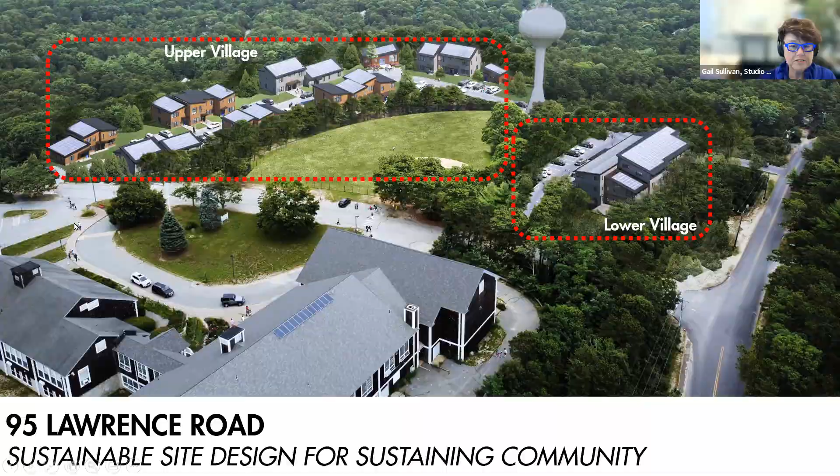And there's also a road connection to Lawrence Road there. It's basically a big loop around the ball field, the way we've organized that. There are a few reasons for that I'll get into. I'm not going to go through all of the detail here.

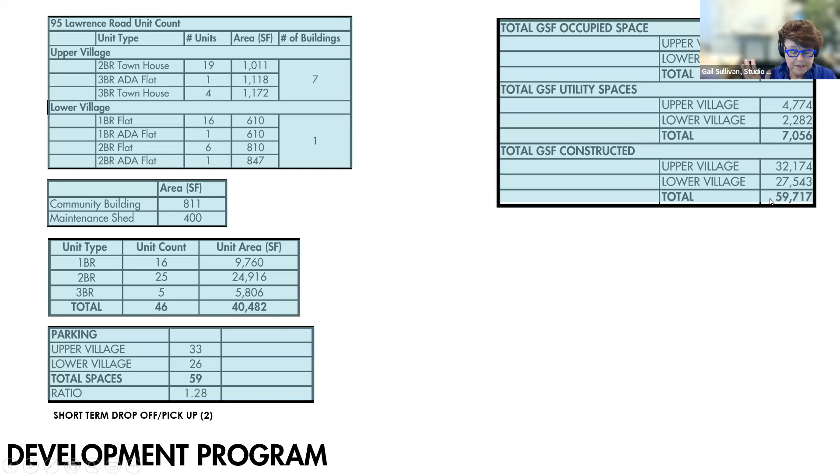I just want you to know that we have all of the details in case there are questions. This is basically giving the unit count, the gross floor area of all of the buildings in total. So we have 40,000, almost 500 square feet of housing, plus another approximately 1,200 square feet for community building and a maintenance shed. So the total gross area constructed is going to be about 59,700 square feet, just a rough idea.

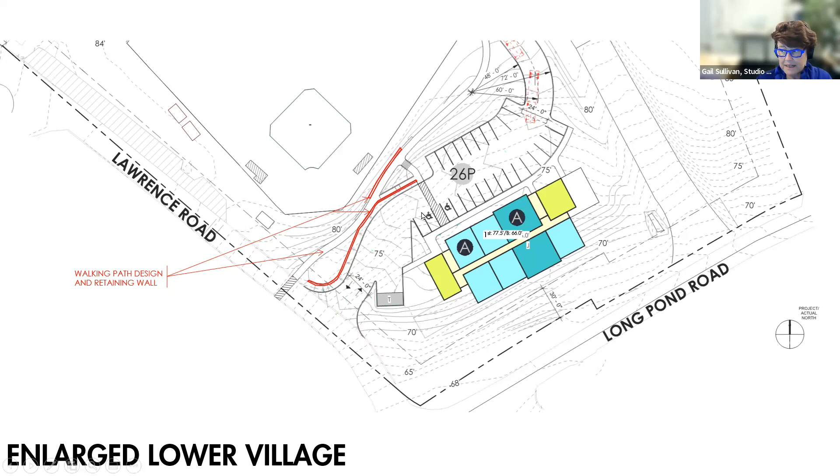So Sean's team has done a magnificent job in the last couple of weeks, really refining this with our landscape architect so that it looks beautiful for everybody.

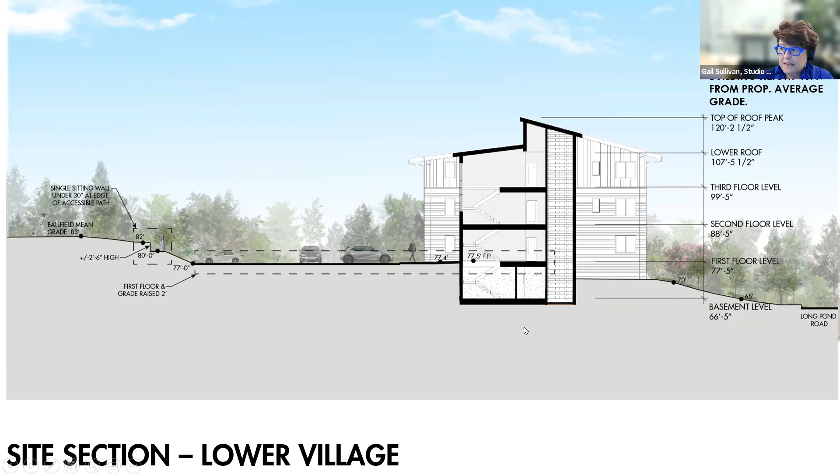The building height from the proposed grade, as shown here, is approximately 45.5 feet. So just for people's sense of it, this is subject to a zoning waiver because it exceeds the allowable building height for a residential use.

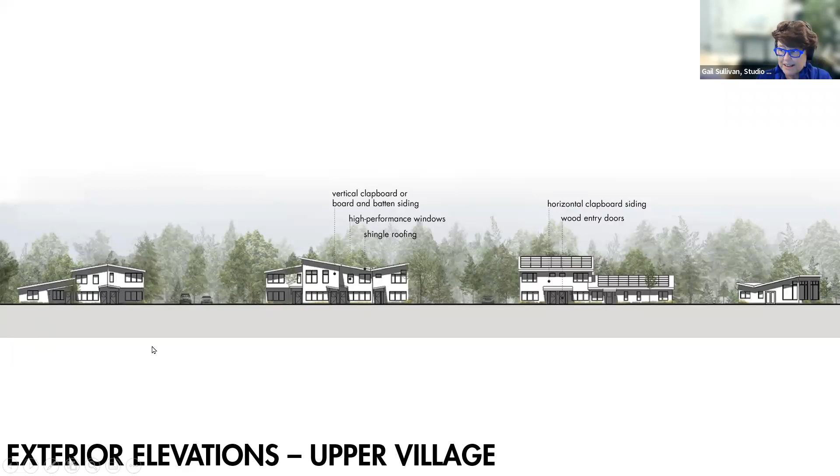What you can see here are a few of the principles we're using. Overall, we have 3 colors of siding proposed for the housing: a light gray, a dark gray, and a cedar color.

We're using a few different forms of siding. Here you see horizontal clapboard siding, pretty common. Here you see shingle, very common in Wellfleet. And here's something a little more unusual, representing the mid-century modern houses: vertical siding, not quite board and batten, but more like that look. That's the same kind of thing we're doing in a variety of ways on each of the houses.

There's also, although it's not so clear here, a point where the building steps back. So this is not a flat facade, and it won't look that large. We're deliberately pushing these buildings back and forth so there's not this kind of monotony of one front wall.

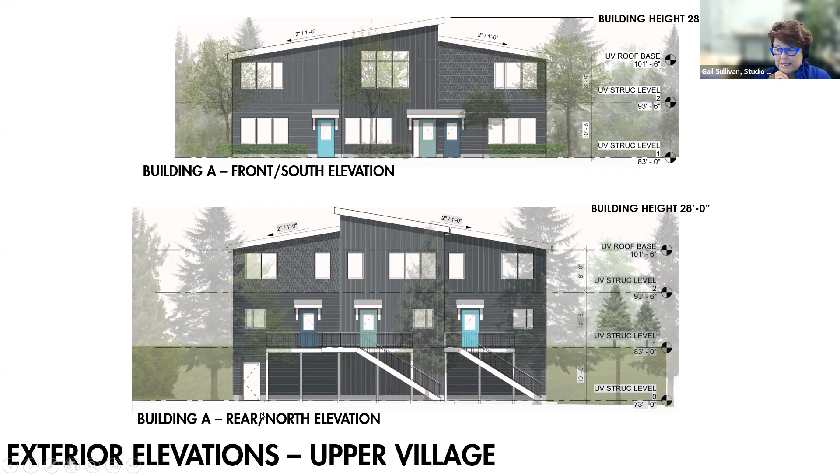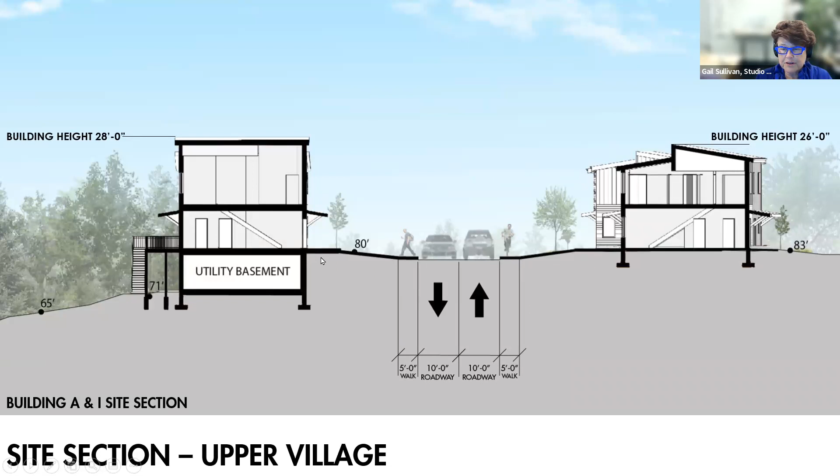And here you see roadway width, sidewalk width, just so you have a sense of how the buildings face each other. We're being very deliberate about these buildings having doors facing each other, creating a sense of neighborhood among these residents.

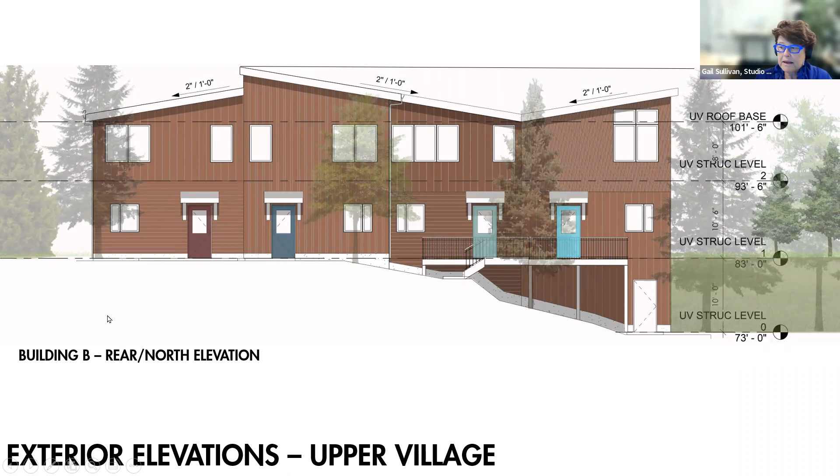Building C, a different one. This is the one that has a 1-story, 3-bedroom flat which is 100% accessible. So this one looks quite different. Their entry is over here on the side because that was the shortest distance we could give them from a parking space, which is also accessible.

I will say I wasn't satisfied with this elevation. We've been changing it this morning, you're not seeing the changes yet because they're not done. But this is going to change a little to make the front facade more friendly, because we didn't think it was friendly enough.

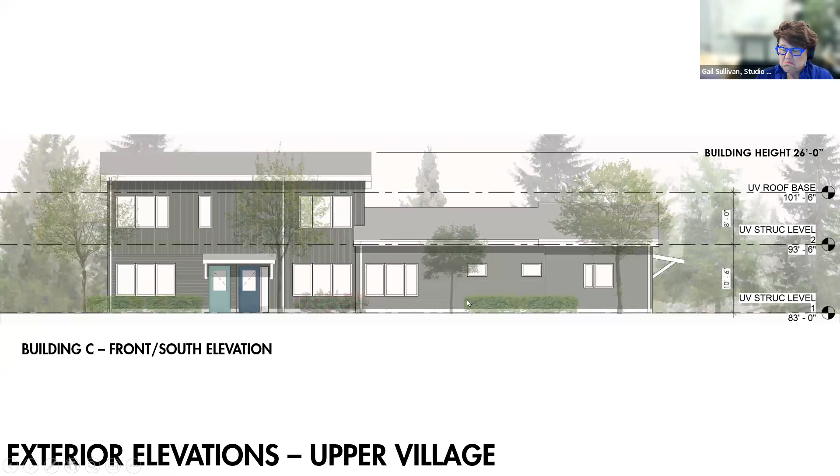Building E, the last of the different types of buildings. Here you see again the different color. The doors have a variety of colors, different siding to differentiate units. And again, the building steps back at that location.

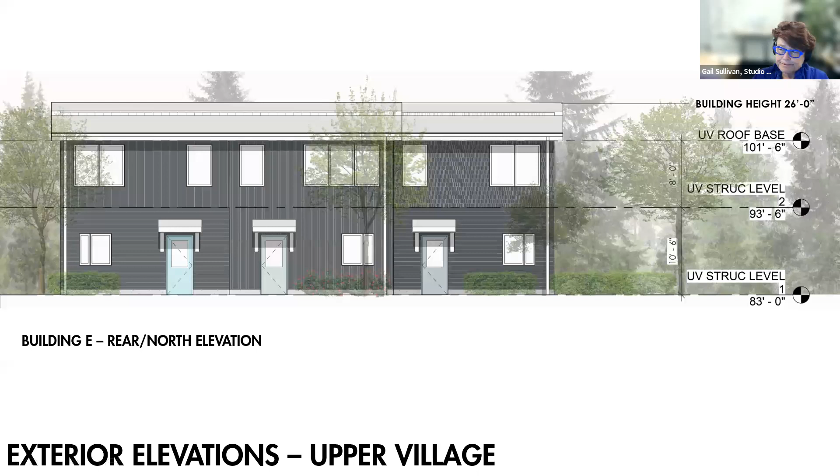You can see in this one the intentionality around planting in front yards, but also giving the residents a chance to have a little bit of ownership over some planting in their front yards. Oh, I lied, one more different one.

Building H, and this is the one that's beyond the community building. So it's the last of the different units. Other than that, they repeat with different colors.

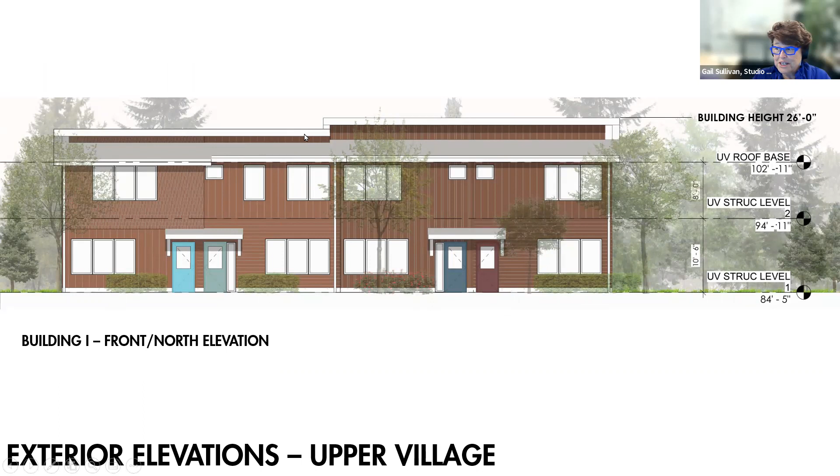Building I, you've seen one that looks like this before. And then the community building here, where if you'd seen it earlier, you would have seen actually the main entry over here. We've redesigned the interior to make it more efficient and allow residents to quickly get into the two things they're most often going to use, which is the mailboxes and package area and the laundry room.

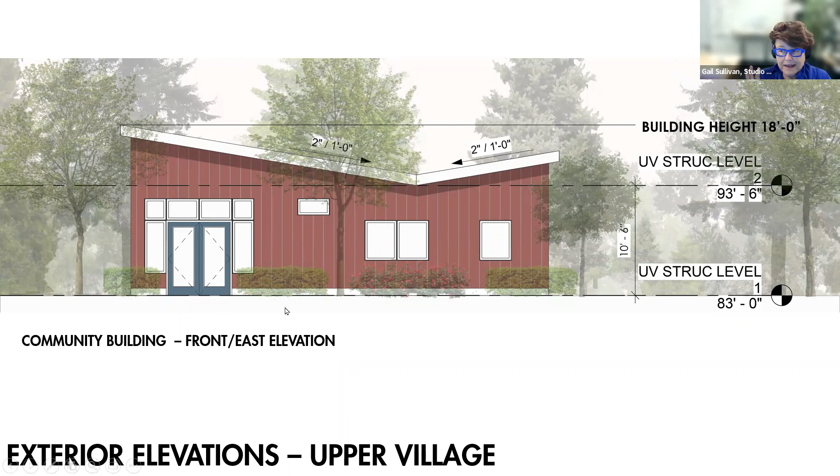So I didn't mention it before, this is a good time to mention it. In the upper village, well in both villages, there's shared laundry. For residents of the upper village, it'll be in this building. So this building contains a large community gathering space with a little kitchenette, a laundry room, a property management office, bathroom, mail and package area.

And I'll stop there and turn it over to Sean. Thank you, Gail. Sean Riley with Coastal Engineering. Thank you for that intro to the whole site.

So we worked with, as Gail said, the fire chief, police chief, DPW. We got their comments. We have wide sweeping turns, all 60-foot radius to accommodate their trucks. We've also incorporated 3 hydrants on the property with a 12-inch water main loop that comes from Lawrence Road through the parking lot and loops back around and ties back into Lawrence Road with the 3 hydrants off of that loop.

The property is going to be equipped with a sewage collection system that will then discharge over to a to-be-developed wastewater treatment facility in conjunction with the school. And the leaching fields for that facility will be within the ball field, actually. So we'll discharge to their collection stub that they're going to leave for us, and all that will be sent over to the treatment facility and then discharged underneath the field.

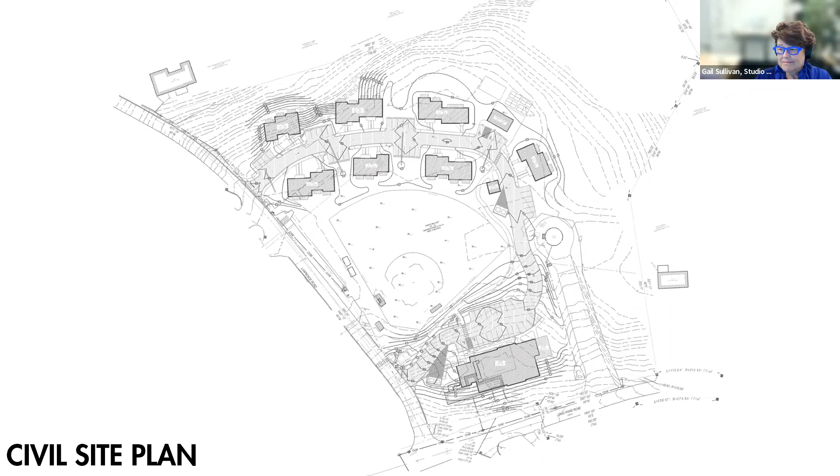So that's pretty much it in a nutshell as far as all the utilities and the access. Gail did a good job talking about the access around, the parking spaces, the trash receptacle locations. And with that, I'll be happy to answer any questions or get any specific details about the utility or site access egress around the site.

Let me just, can you jump to the profile? Sure. So just looking at the road profile throughout the site, we tried to keep everything relatively flat. We've got essentially 2% slopes throughout the site that again direct the stormwater runoff to the catch basins, Stormceptors, and then subsurface leaching recharge basins.

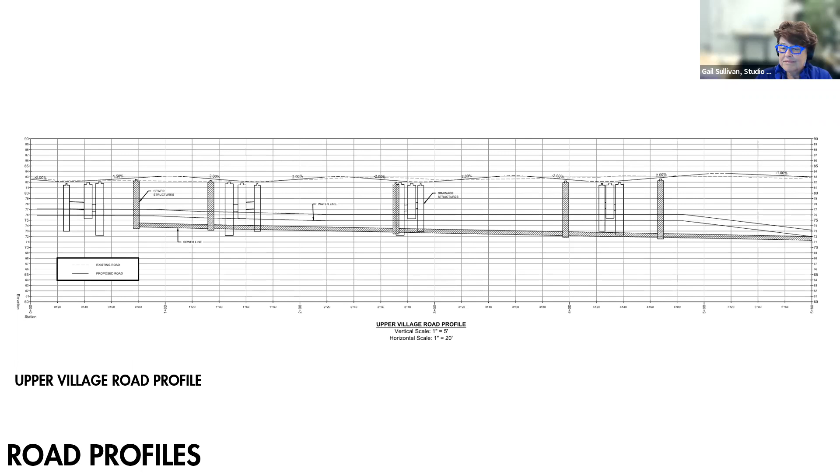It's kind of a tricky site with the ball field being kind of the mesa, the apex of the property, and then everything just kind of rolling off downhill from there. The group has done a great job coming up with this layout to really limit the disturbance on the site. As Gail said, we tried really hard to maintain the vegetative buffer around the perimeter. And they've done so by adding the walkout levels on the upper village and also accommodating that on the lower village facade facing the street. So with that, I'll open it up to any questions you may have.

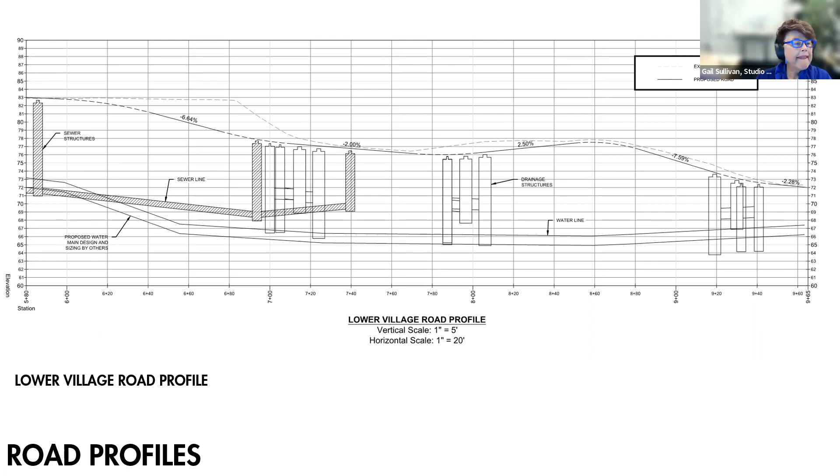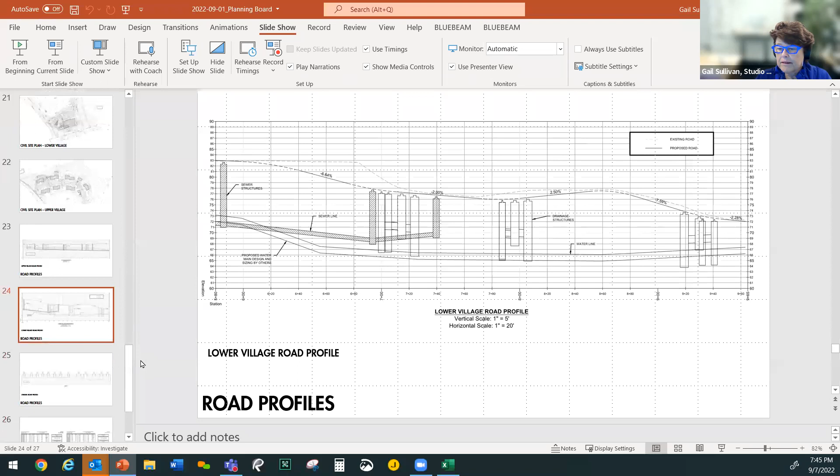Thank you. I wonder if you could talk in more detail about the entrance and exit from the lower village onto Lawrence Road. I'm thinking in particular about left and right turns out of that area, and people coming around from Long Pond Road—there's not a huge amount of space from that corner up to where the exit and entrance is. I'd appreciate your comments on that.

Sure, we had Fort Hill Design, a traffic consultant, do a review of the facility. Gail, would you like to speak to that? Basically, the traffic study indicates a negligible impact—if I recall the punchline of it, it's less than one additional car per minute difference.

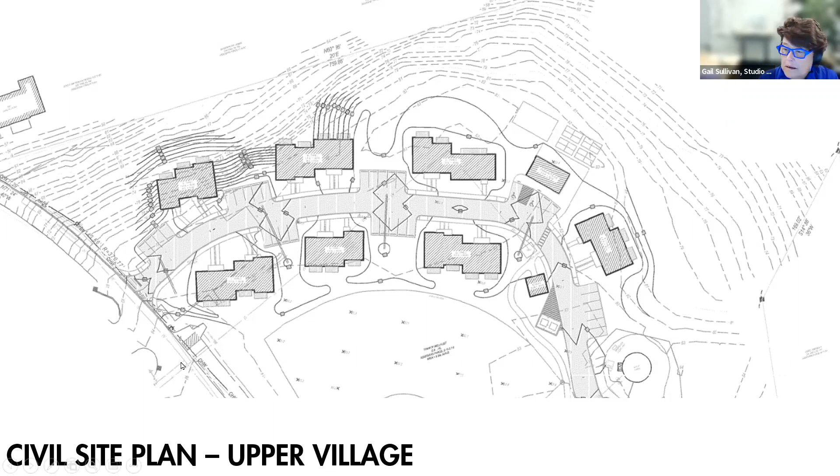No, I actually meant the other part of the site, the lower village, closer to Long Pond Road. Yeah, that's what I was referring to. So he did look at sight distance, the required sight distance from Long Pond Road—looking left, looking right—coming out and entering into the lower village. And there isn't any impact on sight distance or any concern about it.

If I could add, one of the things shaping this is there's an existing piece of equipment here. We're not 100% sure who owns it or what it is, but we decided to stay away from it and just buffer it. If you drive Lawrence Road up from Long Pond a lot, you'll have seen it. That's part of why this road is turning a bit where it is, to access Lawrence Road, and why we couldn't come in higher on Lawrence Road.

Well, I assume at some point someone would figure out what that is and if it needs to stay there. Sean, do you have any information on it?

Yes, I believe that's a backup generator for the utility company. It's owned by the utility company—there are several little vaults below the ground that extend above ground for those backup generators, and they're all vented, whether active or not. They're owned by the utility company. What I saw was it's Verizon, but I'm not sure really what that means.

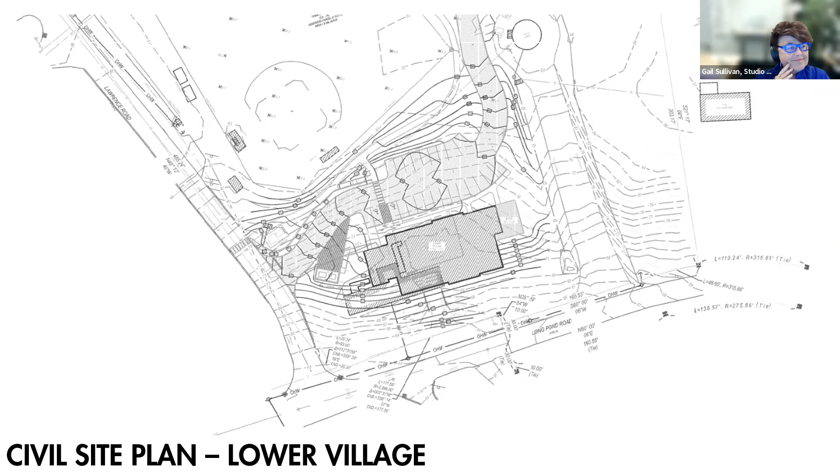David Rao? Just back to parking now—I think our standard is 1.5 per unit, so if there are 46 units, you'd need about 69, and you're already 10 deficient. Although that's our standard, I think it's rather low, because it doesn't really take into account guests and visitors, and that becomes more critical with more units. So with 46 units or thereabouts, you'd assume 10 or 20 guests at any given point in time. So to me, you have a real problem with your limited parking, and you're already deficient—that causes some concern for me, and I don't know if you're able to address that. Given the site, it wouldn't appear that you could.

Yeah, what I'd say is we've worked to eke out every parking space that we can without creating, for instance, a big parking lot in the upper village, and without really wrecking that slope that goes down to the abutting properties along Old Long Pond Road. The other thing you'd have to do is bring the development much further onto the hillside, again sloping down toward Old Long Pond Road, and we really didn't want to disturb that much land. So this really was a balancing act, trying to make sure—we're at a 1.3 ratio rather than the 1.5 that zoning regulations call for, and that's one of the waivers the team has requested from the ZBA.

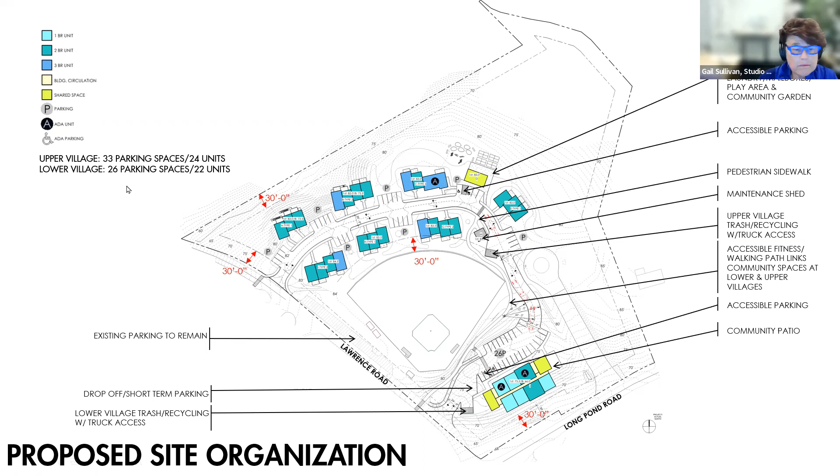We did look at tandem parking, so front to back, toe to toe, or heel to toe parking, and there are three places here, here, and here. Gail, do you want to zoom in a little bit so people can see? Here, there's enough room that we could fit a few. One of the things we don't want to do is have people have to look outside their bedroom windows at parking, so here and over here there are opportunities for tandem parking.

One of the things the team was thinking is if it turns out there aren't enough parking spaces, especially for the 3-bedroom units and maybe the 2-bedroom units, then you would assign a household two parking spaces, but they are the tandem units, so they'd have to negotiate with themselves over coordinating getting those cars out.

What about the existing parking spaces on Lawrence Road? We have asked, but we've been told, and reminded a lot by the ZBA, that we are not to touch that row of parking that's parallel to the baseball field. Okay, so that'll have to be monitored as well by somebody.

Another thing I wanted to say was we could pursue turf pavers as a possible solution, just to be mindful of pervious surfaces and stormwater management. So if we did the tandem, our thought is we would do paving blocks that allow the turf. But again, we think the tandem spaces would take up land that has been undisturbed. It would add asphalt and it would become an eyesore for both residents and abutters and neighbors. It's a tricky balancing act, really tough, because as you may know, the site is so tricky in terms of grading and the slope, it makes everything kind of difficult.

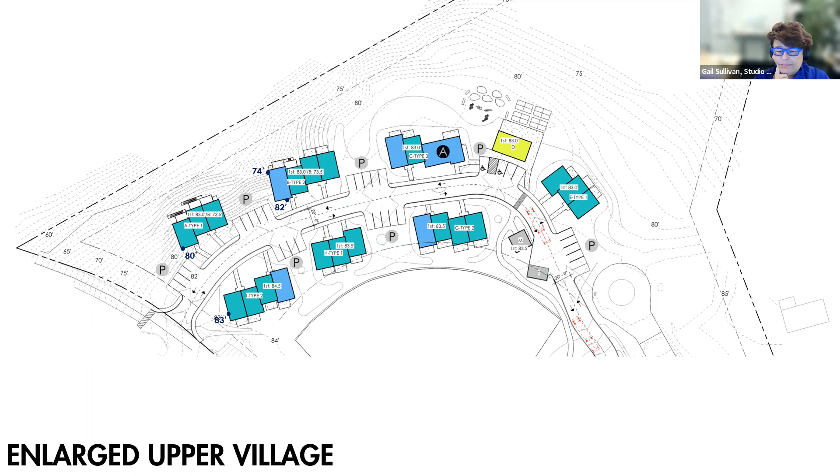Oh, I'm sorry, I did not understand your question. You can send those questions over to our team. So if you have Jay Coburn's email address, perhaps he can share our email address with you. Would that work? I don't. This is Jay, and I'll follow up to make sure you know how to get in touch. I also would just point out that rent includes water—by statute, we don't charge individual residents a water bill, their monthly rent is inclusive of the water. So we'll have to address those metering issues when the final design comes forward.

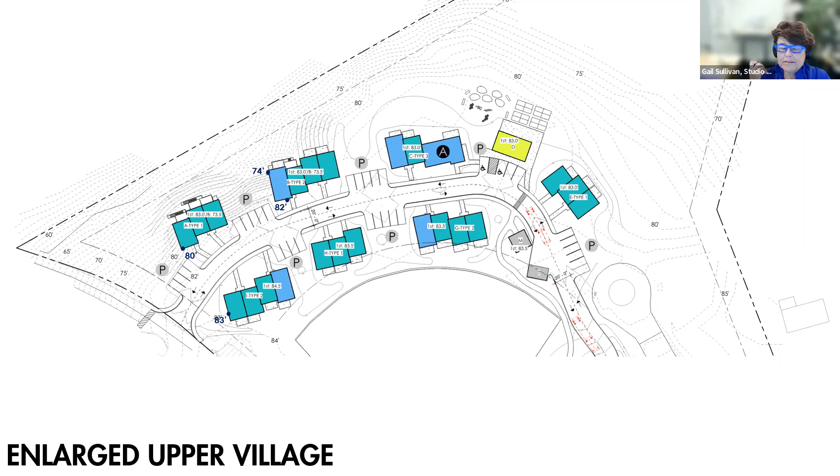Alfred? Karen, does that answer all your questions? No, you haven't answered many at all yet. I'm sorry. Alfred, did your questions get answered? I still don't know who the engineering company is, and I guess Jay's gonna tell me I can send the questions to him. I think at this point, direct the questions to Jay, and I think you will get your answers. Okay. And if he can't, I'm sure he will find the appropriate individual to contact. That's correct. Yeah, we'll help find them.

Thank you. Alfred, I'd like to go back to the parking. What size parking spaces are we using in our design? They're 9 by 18, and the town's requirement is 9 by 20. So it's subject of a waiver request. So we don't have enough parking spaces for what the town requires. And then we're still trying to make them smaller. Is that correct? Shorter, because standard cars these days fit into an 18-foot space.

How is that substandard? It either meets the requirement that's in the book or it doesn't. Oh, I wasn't referring to not meeting the requirements. I said clearly we are asking for a waiver. So we do not meet the size requirement. We do not meet the count requirement.

Those are subject to 2 waivers being requested at the ZBA. What I meant by 'substandard' was...

Historically, 20 years ago, we assumed we needed a 10 by 20 foot parking space for larger cars. The largest cars most people drive these days aren't that large, and in general, parking space sizes have been downsized in most municipalities. So we're doing 9-foot wide by 18-foot long, to minimize the impervious surface and not mess too much with the slope.

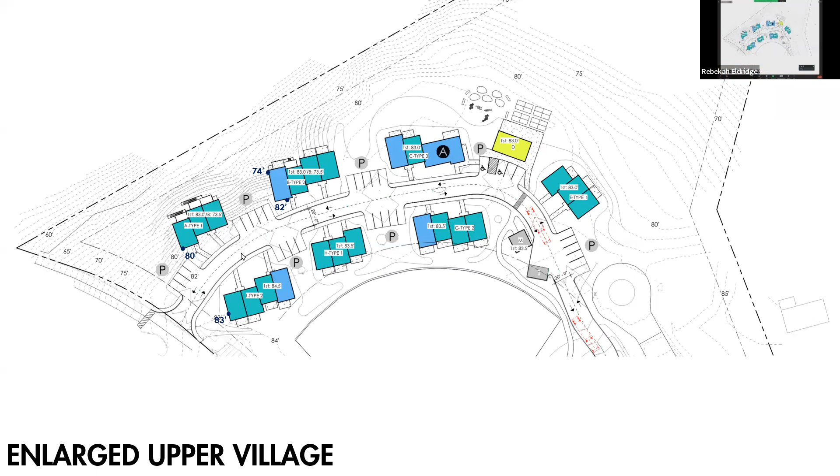So here's - can we go down further, more towards the lower village? Yep, let me see, hold on just a sec. Maybe halfway - first, please? Well, halfway, I don't have a choice. No, that's the only place you can see that bulb with the water tower, sorry, on this screen. Let's go to the bottom one, please. Sorry to interrupt, but that's where my concern is.

So where you're thinking - say, where my cursor is right here? Absolutely right. Sean, help me out, what's your elevation for the parking lot itself? I know it's sloping up. We might be able to squeeze out a couple more spaces on that turn, to your point. Yep, so if we can - the issue will be there's a substantial cross slope here, so it'll be whether Sean's team can figure out how to make that work without creating a big high retaining wall.

Well, I don't see the concern about the retaining wall. If you're building a complex that you may not have enough parking in and then having to fix it later, I think it'd be better to do it right once instead of coming back when there's a parking problem. Because this parking problem, if it exists, is going to be at the elementary school, and there's not going to be anybody in town happy with that. So all the good work you put into this may show up as the first negative.

I think you'd want to consider the parking a little more strongly. We can explore that, we will definitely look at what we can add in there. I don't see the problem with - I forget what you called it - one parking space in front of the other in some of the locations. Tandem, I guess? Tandem parking, yeah, I use that in my facility in Provincetown. It works fine.

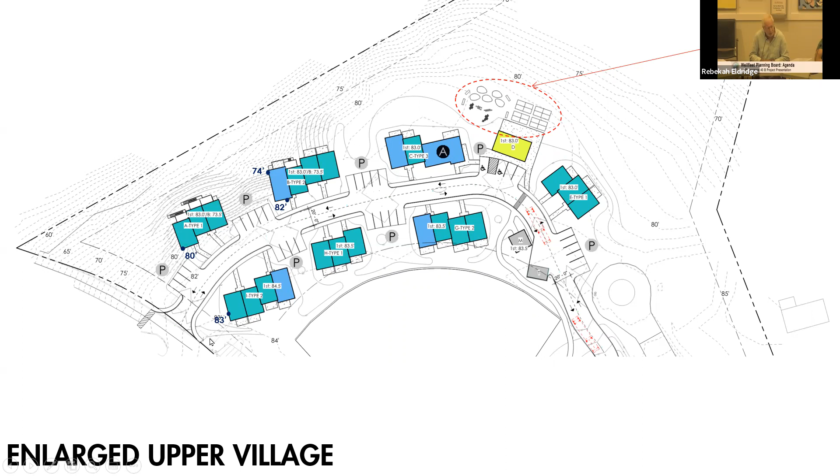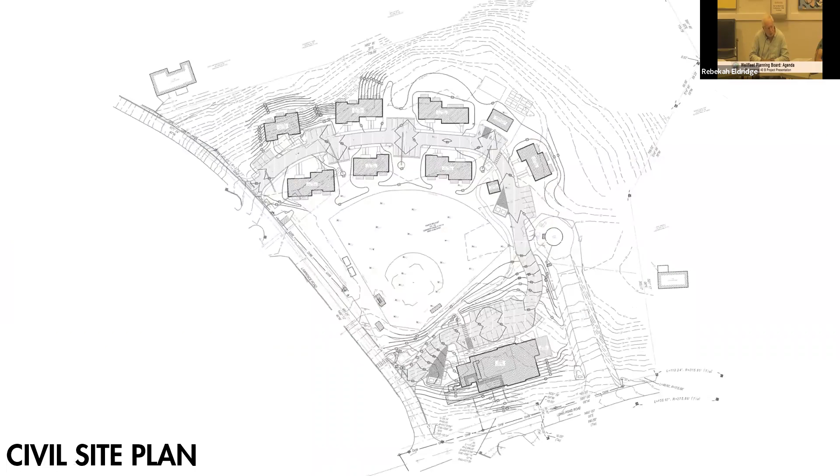Where this is a tight spot, I'm wondering, did anybody ask the town of Wellfleet that the second egress, instead of coming out on Lawrence Road down by Long Pond, hook into halfway up the hill on the water tower road and use that access, which is already there? Long Pond Road is built for a heck of a lot more traffic than Lawrence Road is, and people are going to go to the beach from there, come into town. So I'm wondering if the developers had looked at that access as a possibility.

We did actually talk at one point with Jay Norton about that, and the access to the water tower has to be protected because it's a public water source, drinking water source. Perhaps you could go part way up, but we ended up giving it up because it didn't make any sense in terms of giving the security that's needed for a public drinking water source.

For the water source, yeah. Can you, based on that, I understand, I'd like to see you push that envelope a little harder. The grading was also an issue up that way. I didn't get that. I think the grading was also an issue. Oh, okay, because I was looking at the topography. I know they get up it.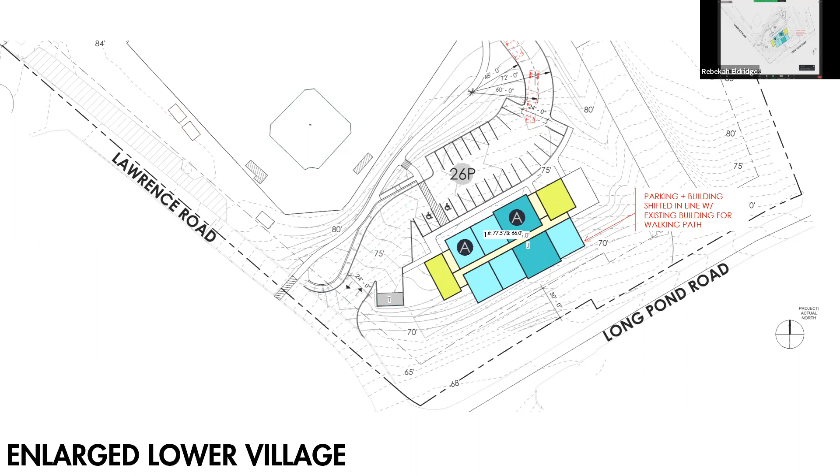All right, bring it back to the board members. Any recommendations board members would like to submit to the Board of Appeals? I'll address it to Jay since he's sitting here and I can guide him. I believe you have a meeting tomorrow night — board members, if we have any input, I'd like to get it done quickly tonight so Karen can get over to the meeting tomorrow night. I imagine we have a full plate anyway and can't really address it, but at least they've got it there.

If I could just elaborate, Mr. Chairman — we have a full session tomorrow night with the ZBA, going into detail to continue the discussion. We'll be looking at the traffic report and parking issues with the ZBA tomorrow night. We have another hearing scheduled on the 22nd as well, where we're hoping to finalize and address all of the different issues. If I could share one of the pressures we're up against — the state only accepts applications for affordable housing developments on an annual basis.